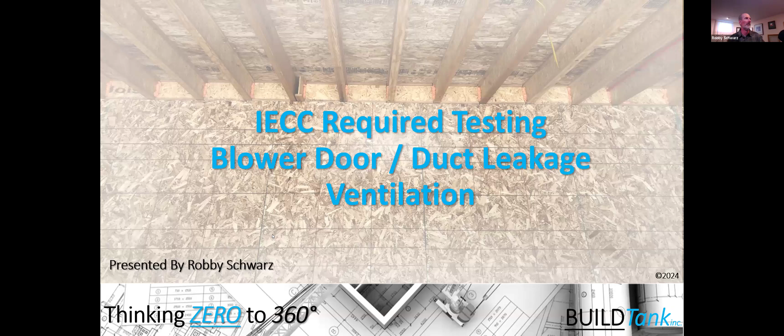You'll see that the title has been broadened slightly to include duct leakage testing and ventilation testing, basically the three main tests required by the IECC. I also wanted to note that next week's presentation on radon testing has been broadened to talk more about the radon issue and mitigation, because testing is a pretty small part of the radon puzzle. So join us next week as well.

Today we're going to talk about these tests. We'll talk about why we care about diagnostics, and we'll cover blower door, duct leakage, and ventilation testing.

The first thing: in the 2024 IECC, the intent statement has been broadened quite significantly to talk about minimum efficiency requirements that result in maximum levels of energy efficiency that are safe, technologically feasible, life cycle cost effective, and economically feasible.

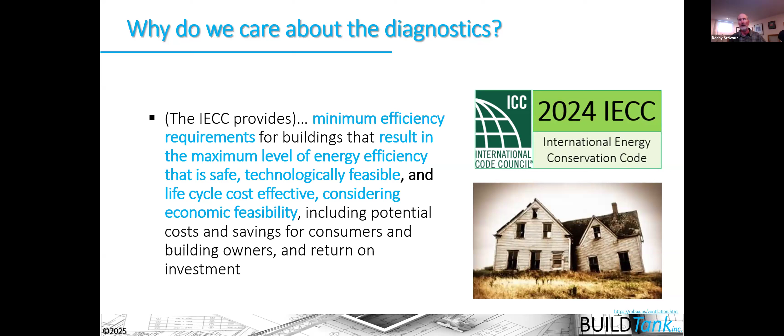Addressing air and air movement in our houses is really the most cost effective way to get an efficient house. We see that come to fruition when you look at the 2012 IECC and the Department of Energy's determination that almost 20% efficiency gains were achieved in that cycle, largely on the back of the requirement for blower door testing in all the houses we build.

When we do blower door testing, we have to go back to the code and understand how it's looking at the building thermal envelope, because we need that clear boundary condition between conditioned space and exempt unconditioned space in order to do a blower door test.

In essence, we need that boundary condition for duct leakage testing and for ventilation testing too. But the boundaries change when we talk about ducts and ventilation - we're talking about the boundary between inside the duct and outside the duct, versus the blower door test, where we're talking about inside the house versus outside the house, conditioned space versus exempt unconditioned space.

We have to be able to clearly define what that conditioned space is, because this is currently primarily a volumetric measurement, and we need to understand what the volume of air is inside that house.

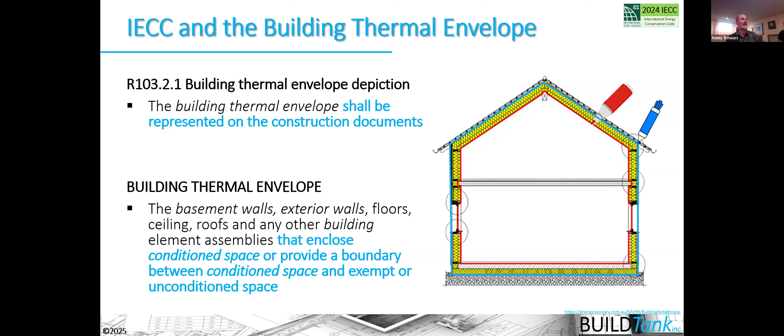So when we get that sound building thermal envelope, ultimately we are able to gain better control and predictability of airflow, thermal flow, and moisture flow inside those houses. This gets us to the question of why we ultimately care about diagnostics: because they help us achieve the requirements.

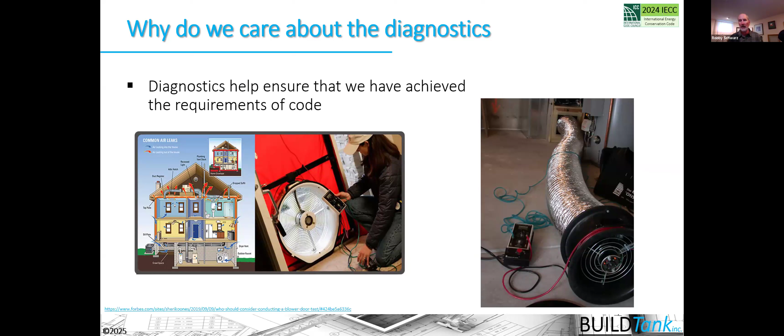One of my mentors used to always say, you get what you inspect, not what you expect. If we're counting on air tightness in our building thermal envelope, duct systems, and ventilation systems to provide the right flow of air, then we have to test to ensure that's happening, because you can't just look at the building thermal envelope and know it's airtight.

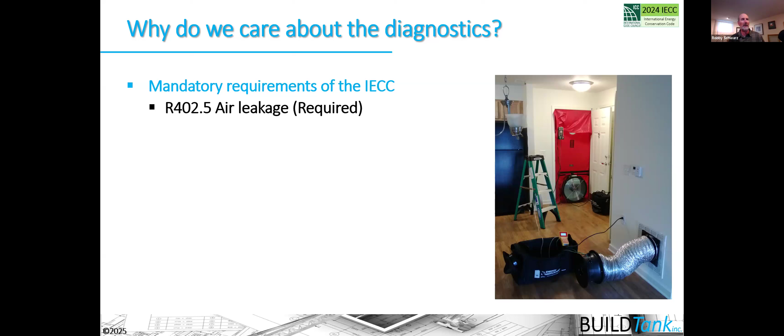There are mandatory requirements in the IECC that help us achieve air tightness, and ultimately we're required to test not only the air leakage of the house but the duct leakage as well. The other thing this does is that in these performance paths through the code, we gain additional trade-off flexibility, so we can potentially trade off house tightness for R-value, or duct leakage and duct location for R-value, giving more flexibility in how we design and construct our building assemblies.

Now, to be clear, what we often call the ResCheck, or the area-weighted U-value compliance approach, uses software in the prescriptive compliance approach for code compliance—that only gives you the ability to trade off U-values and R-values. So you have to go to the simulated building performance approach or the ERI approach, the R405 and R406 pathways, in order to get this additional flexibility. But it is there, and you can take advantage of it.

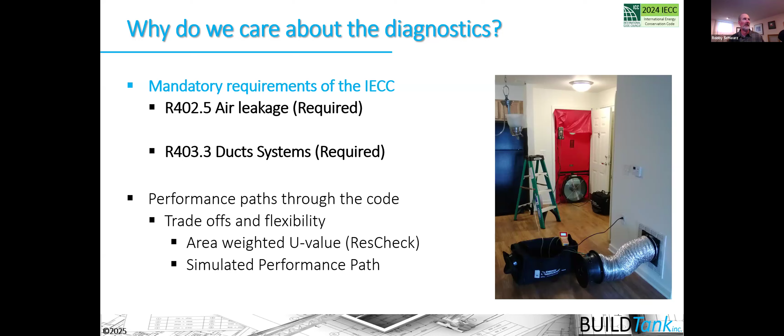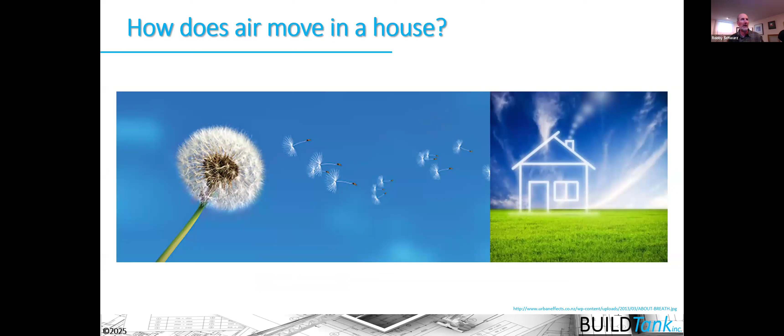So jumping into blower door testing itself, obviously we can test a variety of different building types out there, but we have to have an understanding of how air moves, and air moves in our homes in particular.

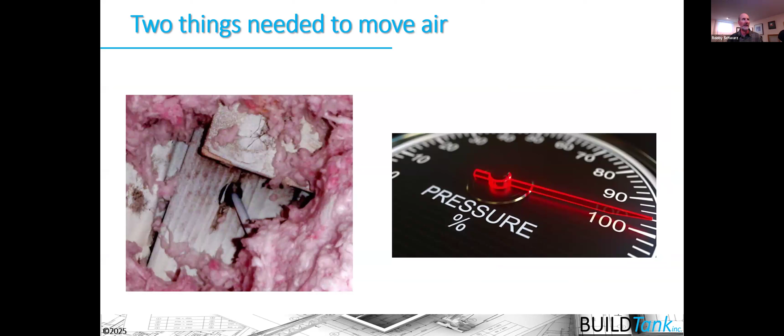So the first thing we need to think about is what has to happen for air to move. We have to have a hole, or this boundary condition that we talked about, in that boundary condition, and you have to have some pressure across the boundary condition in order for air to move across that boundary.

When we talk about pressures across the building thermal envelope, it's always important to know where you're standing and what you're referencing to the outside. In most cases with blower door testing, we're standing inside the house and referencing outside the house. So I have a tube measuring the pressure inside the house with regards to outside the house—I'm always understanding the boundary condition that I'm measuring across.

We have certain ways that pressure is created across that boundary condition of the building thermal envelope, and we call those the stack pressure, the wind pressure, and mechanical pressures that are created there. These are basically forces against the surface of that boundary that either create a positive pressure or a negative pressure in specific zones. So that's what we're trying to determine there.

Ultimately, we're measuring that pressure difference across the boundary. When we do these diagnostic tests, there are a variety of ways you can measure it. HVAC contractors often use inches of water column, but we use a metric unit called pascals, or newtons per square meter, in order to do that.

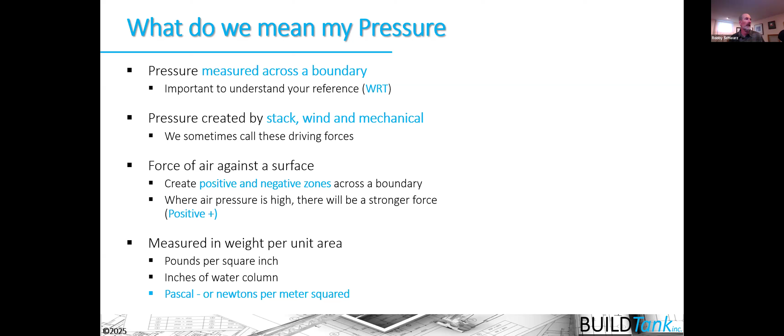So we have this sound building thermal envelope that's defined by the code, and we are determining what the pressure difference is across that hole, or across that boundary.

So you can think of this balloon, for example—the rubber membrane of the balloon—as the boundary, or the building thermal envelope. And if I have equal pressure and no hole across that balloon, then the balloon is going to remain inflated. But as soon as I put a hole in the building thermal envelope, or in the balloon's rubber membrane, the dynamic changes quite a bit.

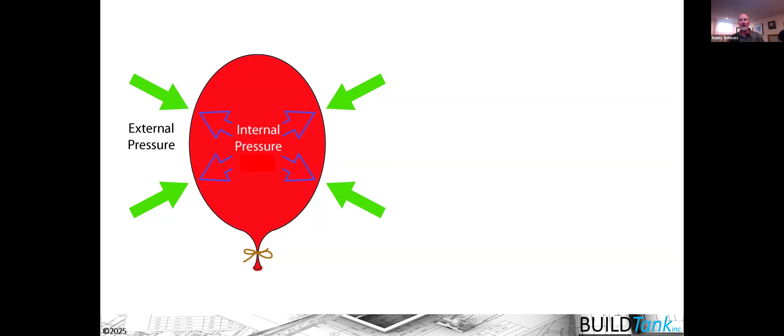So if I untie this balloon, it's going to shoot across the room because I have greater pressure inside than I have outside the balloon. Again, I need the pressure difference across the building envelope, or the rubber membrane in this case, and I need a hole in order for air to move across that hole.

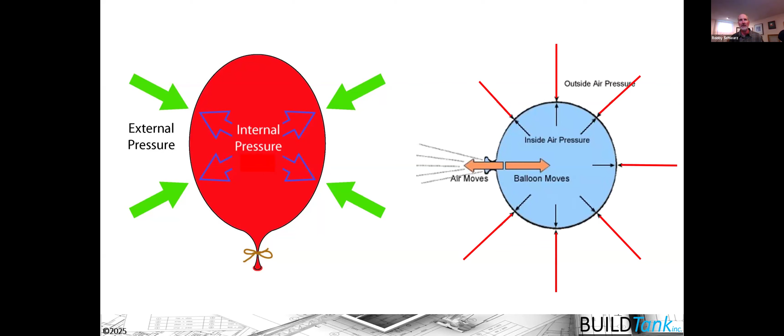And so it's much easier for us to control the holes in the building envelope rather than the pressures there. So the code is all about trying to figure out ways to ensure that we have a tight building envelope.

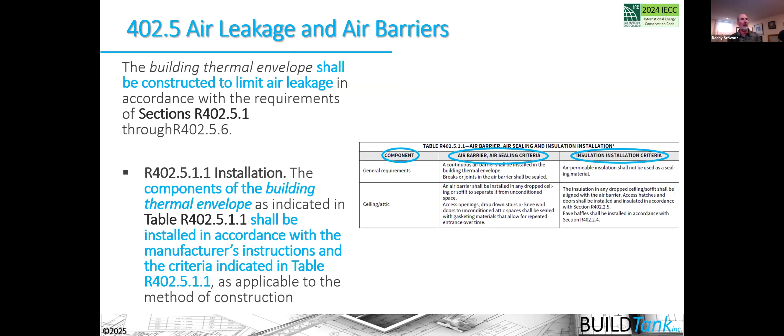That we sealed up all the holes, and therefore we have the air barrier, air sealing, and insulation installation table here, which you could think of as a checklist for how to create an airtight house that's going to meet the requirements of the IECC and seal up all those holes, because I can't really control the air leakage that happens across holes driven by different pressures, the stack pressure, the mechanical pressures, and other pressures we might see in that house. So this table details out these different components, and you can use them as examples of what you're going to see in the house and how to address them from an air barrier and air sealing perspective, and from an insulation perspective. But what that table is ultimately getting at is how air moves through our houses.

So we measure airflow in cubic feet per minute of air moving through the building envelope. So again, we have to have that sound building envelope that we're measuring across. And the notion is that envelope traps a specific volume of air inside of that house. And that volume of air doesn't change once you've been able to clearly define that building thermal envelope air barrier system there. Because remember, the building thermal envelope is the alignment of our thermal layer and our air control layer all the way around the house, including that portion that's going across the dirt at the bottom of the foundation. There's our slab, for example, in a basement, or the dirt floor in a crawl space that we need to contain the air movement through.

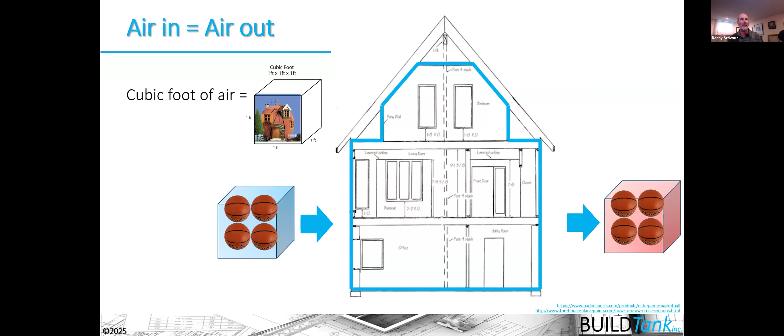So whenever we have a cubic foot of air going through the house, and we can think about a cubic foot of air as a number of basketballs going into the house, then that cubic foot of air has to leave the house. So if a basketball enters the house through wind pressure, then it has to leave the house as well. So air in equals air out, and that's the fundamental building science there. Air is a fluid, just like water's a fluid. We need a hole, and we need some type of driving force or pressure difference across the hole in order to get air to move in and out of our houses. And we measure it in cubic feet per minute, or about the size of a basketball going in and out of our houses.

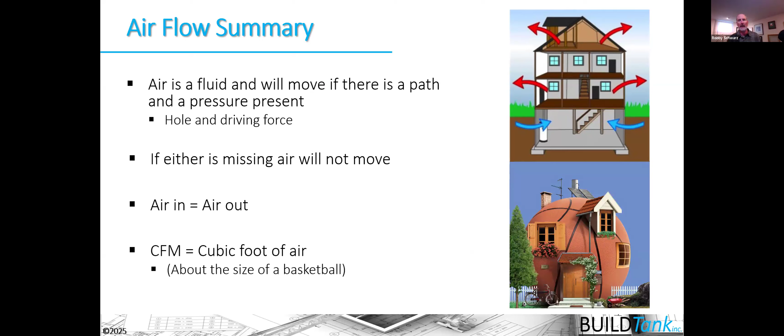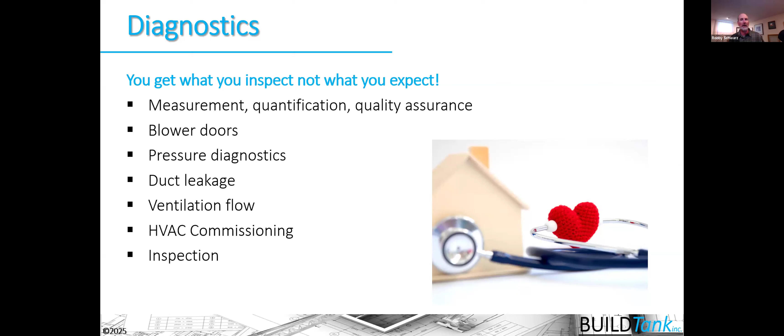So diagnostics, again, you get what you inspect, not what you expect. It gives us a way to measure or quantify and do quality assurance on the building thermal envelope. We use blower doors, and we can do pressure diagnostics with those blower doors. We can measure duct leakage and ventilation flow. We can do levels of HVAC commissioning to understand how much airflow a system is actually achieving. So there are a variety of things we can do with diagnostics, but the code is asking us to build our houses tight and ventilate them right, and we're trying to understand has that actually happened in that particular house in relation to what the code requires.

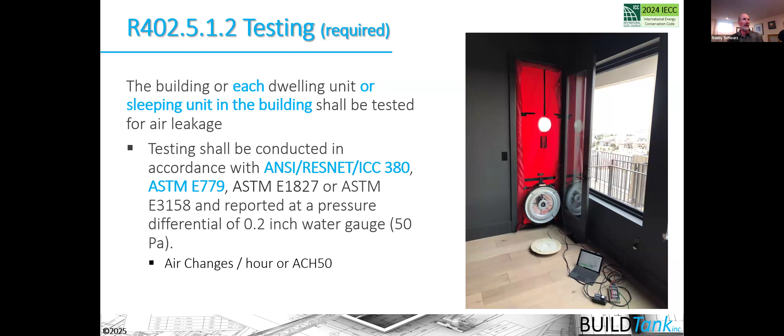So when we do the blower door test, we have to measure the air leakage of that house using a blower door depicted here. And now we have to actually follow a standard for how to do that. Primarily we're using the ANSI/RESNET/ICC 380 standard, which incorporates the ASTM E779 standard and these other standards. So now that the ANSI ICC standard has been created, that's the primary standard we're following, and that makes a lot of sense because the majority of people doing these tests are energy raters, and they're already following these standards. So it makes sense that we've kind of defaulted to the ANSI 380 standard there.

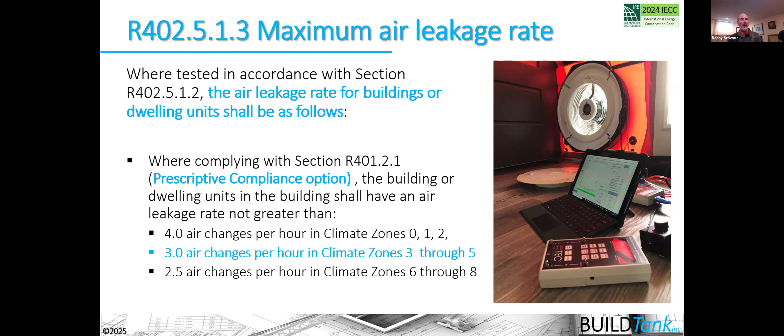Now, where tested, the maximum air leakage rate has changed a little bit in the 2024 IECC when you're using the prescriptive compliance option. They've made different air leakage rates depending on your climate zone. So in our climate zone here, climate zone 5, that hasn't changed. But as you start moving up into the mountains, into climate zone 6 and 7, you're now required to have a slightly more airtight house, 2.5 air changes instead of 3. And you can see that in climate zones 0 through 2, the tightness has gotten a little tighter as well, from 5 air changes to 4 air changes there.

Because air leakage can be used as a method to trade off for less R-value in a building component when you use sections R405 and R406, they had to put in a maximum air leakage rate of 4 air changes. But they've also introduced a secondary method of measuring air leakage, a CFM per square foot of building thermal envelope area, as an alternative means of measuring it, because it turns out that the volumetric measurement in air changes per hour isn't the most effective way to measure air leakage.

We'll talk about that in a little bit, but this section has been made significantly more clear than in the 2021 IECC, where this first came into account, with a different air leakage rate for the performance compliance approaches versus the prescriptive compliance approaches. So when you read it in the 2021 code, you might think they were lessening the air leakage base requirement from 3 air changes to 5 air changes.

But that's only in relationship to the performance compliance approaches, R405 and R406, because you potentially can do this trade-off that doesn't happen very often, where you might put more insulation in the house in order to have a leakier house. In most cases, the trade-off works where you're tightening up the house to reduce the R-value in certain locations, not the other way around, but they wanted to put in a backstop to guard against that. This is how it's expressed in the 2024 IECC, which again is much better than the way it's expressed in the 2021 IECC.

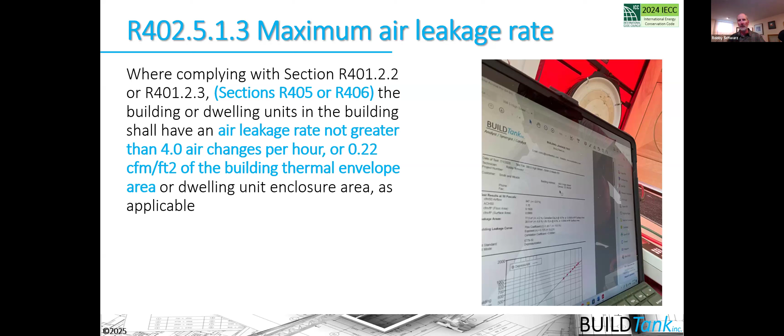The basics of a blower door test: you put a device, a blower door, into the building thermal envelope. It's an airtight assembly with a fan blower inserted into a nylon fabric. Ultimately, we are depressurizing the house, sucking air out of the house and forcing air to come back in. Remember, air in equals air out, the basketball analogy we used before.

This is a scientific, repeatable test because of the standards we're using. So if I do the test in Colorado and somebody else does it in Massachusetts, we're doing the test in the same way, and we're going to get repeatable results.

But it is measuring a moment in time, and we need to understand that, because at different times of the day, the wind might be blowing, or the stack effect might be higher when temperatures are different inside and outside the house. Ultimately, we're getting an understanding of how leaky the house is, but it's not representative of how the house is going to leak every minute of the year, every day of the week.

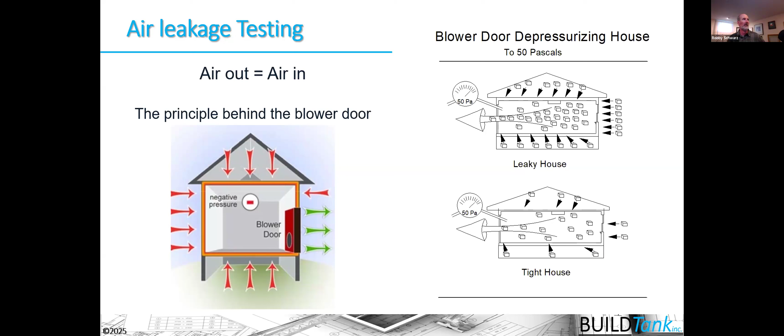Ultimately, how we're measuring that is using the pascals of pressure across the building thermal envelope, and then measuring the cubic feet of air that's moving through the fan. We need to talk a little bit about pascals, because they are a very powerful unit of measurement in the metric system that gives us the ability to measure positive and negative pressures across the building envelope.

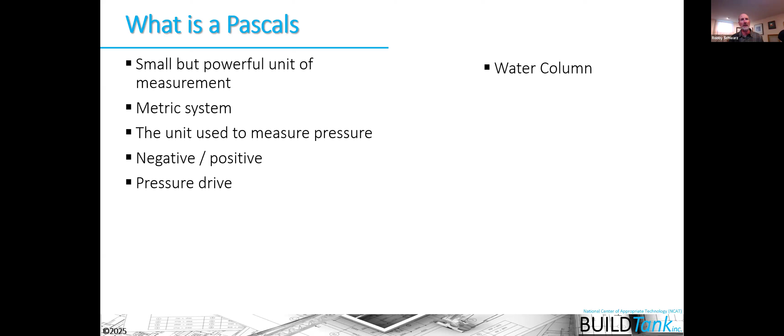It's similar to measuring using water columns, so I'm going to give us an analogy of water columns: 1 inch of water column is equal to 250 pascals of pressure.

One post-it note pushing down on your hand is equivalent to roughly 1 Pascal. Another way of thinking about it is the pressure in your tires is equivalent to about 250,000 Pascals. So it's a small unit of measurement, but a really powerful one, because it only takes a very small negative pressure to backdraft an atmospherically vented water heater and get carbon monoxide flowing inside the house rather than outside.

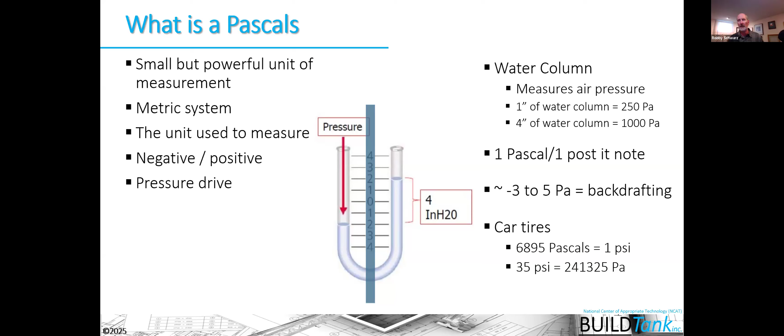We always want to understand the units we're measuring in and why we're using those powerful units of measurement in Pascals, because they get us down to the details we need when doing combustion safety testing with a blower door, or other types of pressure measurements we might do with a blower door beyond just the blower door test itself.

The blower door test helps us understand how airtight the house is, how much leakage is happening under relatively natural conditions, because when I depressurize the house to 50 Pascals, it's roughly equivalent to a 20 mile an hour wind on all surfaces of the house simultaneously under these test conditions.

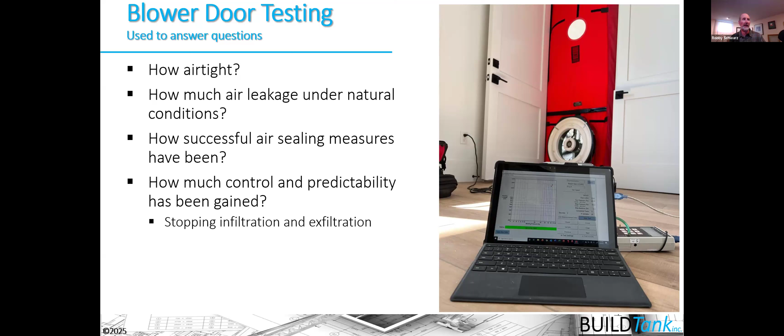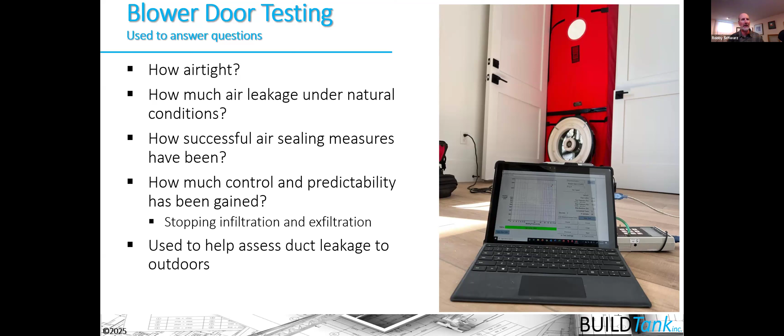We can see how successful we've been at air sealing the house, how much control and predictability we're gaining over the airflow, moisture flow, and thermal flow happening throughout the house. We want to close up those holes and limit the infiltration and exfiltration happening in the house. And we'll see, as we talk about duct leakage, that we need the blower door to measure duct leakage to outdoors, which gives us an additional trade-off credit in our houses.

I wanted to talk about the difference between infiltration, or random air leakage, and ventilation, because that's confusing to some people. We need to understand that infiltration is uncontrolled air movement from outside to inside the house, or inside to outside if we call it exfiltration instead, whereas ventilation is a controlled process where we bring mechanical ventilation systems into the house to bring air in and out in a controlled and predictable fashion.

Now, we might be using holes in the building envelope to ventilate the house as well, if we're using an exhaust ventilation strategy or a supply ventilation strategy, but we're putting that fan in so we know exactly how much air is moving through the holes in the building envelope, and we're putting it on a timed system so we have better control and predictability.

The building science is basically saying that we need that control and predictability of ventilation air, and we need the tightness of the house, in order to gain better control and predictability of airflow, thermal flow, and moisture flow inside those houses.

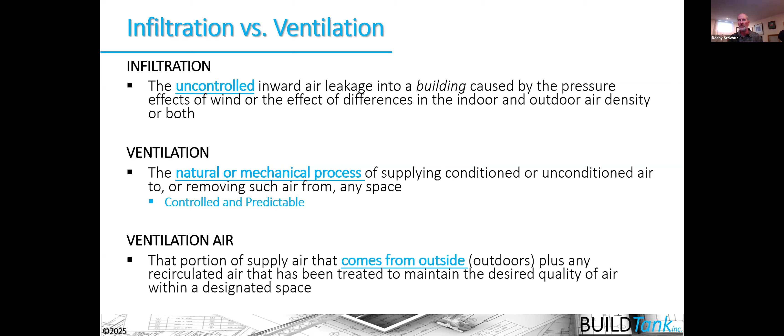One of the last things I wanted to talk about: new to the 2024 IECC is that if you're dealing with attached housing that's 3 stories or less, basically multifamily housing, you are now allowed in the 2024 IECC to do a sampling of testing in those units instead of having to test every single unit in a 3-story multifamily building.

So if you're in charge of a jurisdiction, you want to take that into account because you'll definitely be asked about that. This brings up the notion that there are different types of blower door tests you'll also be asked about. If we have a detached single family home, it's different testing that enclosure versus testing an enclosure inside a multifamily building that's 3 stories or less.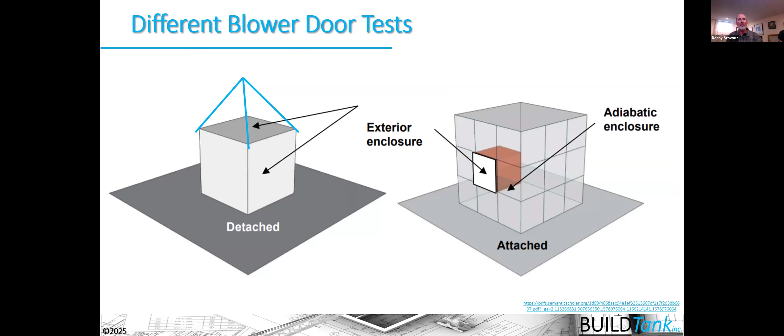When we're talking about attached housing, we're often talking about whether there's leakage happening across the wall system or the floor system that is adjacent to additional attached units in that building.

I can tell you in townhouses and duplexes that there's very little leakage happening from unit to unit. Most of the leakage is associated with shaft liner area separation walls and the 3/4 inch gaps required by the assembly, but attached to the outside or attached to ventilated attic spaces.

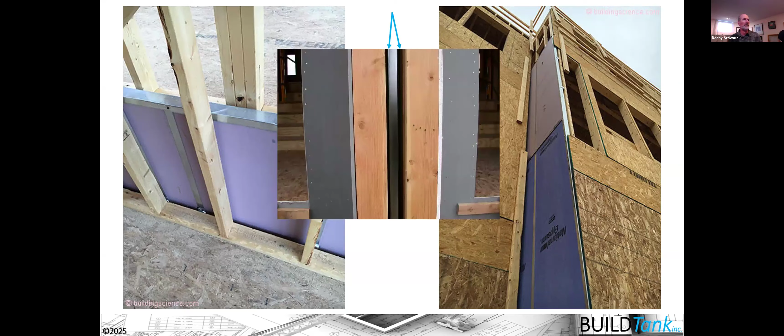But when we get into multifamily buildings, that dynamic might change because we have a bigger thermal envelope that is the boundary there. So you might be asked: can I do compartmentalization testing?

Can I do whole building testing, or can I do guarded testing when we're doing these types of blower door testing on multifamily buildings that are governed by the residential energy code there?

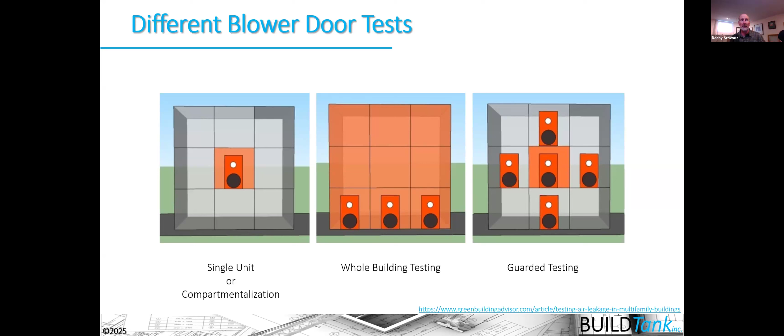My favorite is the single unit compartmentalization test, because it ensures that from an energy perspective we're creating an airtight house to stop leakage from inside the unit to directly outdoors, but I'm also dealing with health and nuisance odors that might be coming from adjacent dwelling units leaking across this assembly. So if this is tight, the unit's front wall adjacent to the outside is going to be tight as well, and we're going to have less energy issues, but I'm also maybe not going to smell the guy next door that's smoking pot or whatever they're doing there. So I like the compartmentalization test.

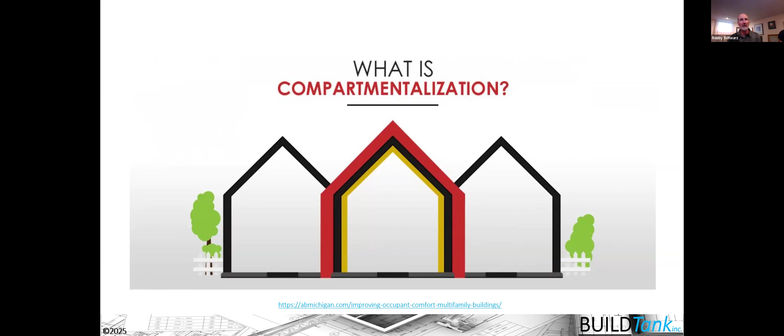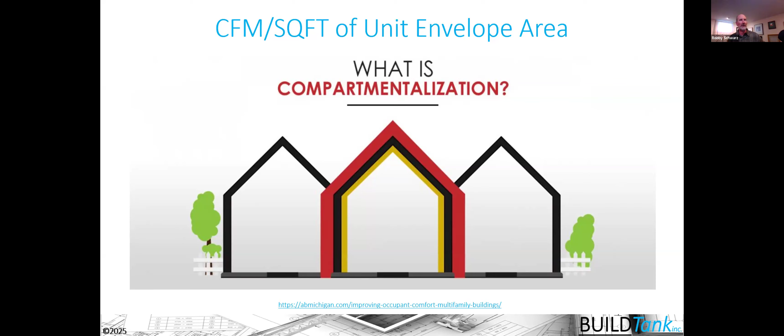It's the most economical testing to do, but you might be asked about the other types of tests. This is the test where that other metric comes in, where we're getting the CFM per square foot of unit enclosure or envelope area. We're trying to figure out how much leakage is happening through the actual building envelope rather than just this volumetric measurement. Now, the other thing this brings up is what we call guarded testing.

So if I only want to know the efficiency determination of this unit, then I only care about the leakage at the front of the building and at the back of the building. So those two walls of this center unit are what I care about from truly the energy perspective.

In order to get just that leakage, I have to put blower doors in the surrounding units to take out the leakage happening across the common wall or common floor between these units. If I depressurize all of these units simultaneously to 50 pascals inside the unit in relationship to outdoors, then I've taken away the leakage happening across the wall, and I can measure just the leakage happening to the outdoor unit. That is definitely possible to do, and you might be asked if I can do that in your specific jurisdiction.

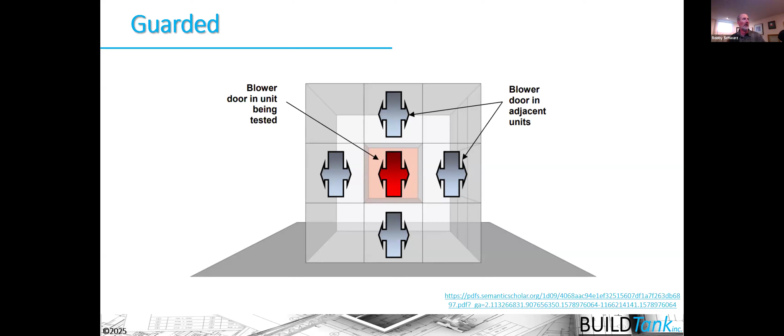But what I would say is that it's costly, because I have to have a number of blower doors set up simultaneously to do that, and a number of technicians out on site. So again, I think the compartmentalization testing is the most cost-effective testing that's out there.

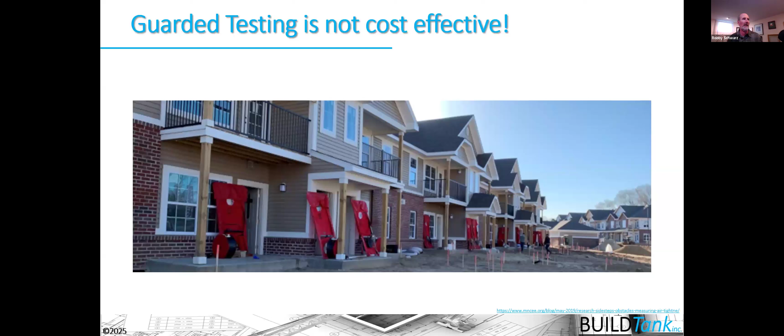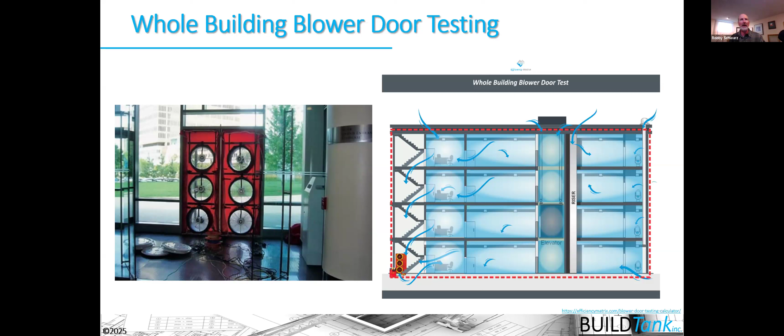I might need 6 blower doors to do that, to depressurize it to 50 pascals, or potentially you might have to change your metric to 75 pascals of pressure inside the building in relationship to outside the building. But you can do that and get the results. So again, there are a variety of different ways to do blower door testing, and you might be asked about that in your particular jurisdiction.

I think the last thing I wanted to talk about with regards to blower doors is that you can utilize the blower door to measure other things, like whether the garage is actually separated from the house as required by code.

Now, only one jurisdiction that I'm aware of in Colorado requires this particular test, and that's the city of Fort Collins, which requires that the garage be measured and proven to be separate from the house because of the health and safety issues associated with that garage connection.

But it's a very simple test to do. If you have a blower door already set up, it takes an additional maybe 5 to 10 minutes to get that number and ensure that the garage is separated. So you can do these, what we call zonal pressure testing, to ensure that a specific zone or building cavity, or in this case garage, is actually separated from the house.

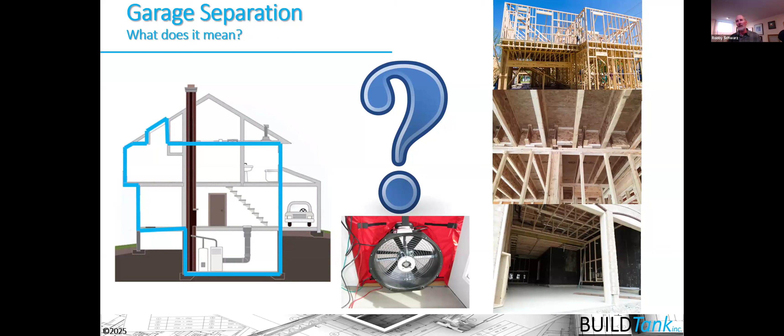While I'm talking about garages, I should make it clear that the garage is always outside the building thermal envelope. Even if that garage is heated, conditioned, and insulated, you never include the garage space in the volume of the space you're testing for air leakage during blower door tests, because of all the incidental stuff we store in garages that are health and safety issues—our car that we start up putting carbon monoxide in there, paints, gas, insecticides, and other stuff. We want to make sure that air is always outside the habitable space of the house.

Let's move on to duct leakage testing. We have to clearly define the duct system, and the 2024 IECC has taken another stab at defining it so we're crystal clear that we're including the entirety of the duct system—things like filter boxes, air handler cabinets, and other transition pieces—all the way out to the duct boot and its surface, not inside the duct boot. We want to tape off these systems appropriately to ensure we're getting the entire duct system incorporated when measuring duct leakage.

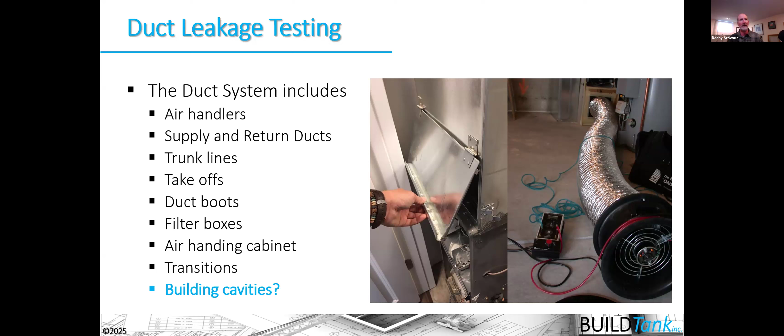We have to take into account that building cavities are excluded. We are not allowed to use building cavities as pressurized duct systems in the International Energy Conservation Code. That happens in R403.3.2, where it specifically says we can't do that.

This is an example of a building cavity being used in a ranch-style house on a summer day. You can see the duct system's return is pulling air back to the furnace cabinet to recool, since it's the cooling season being represented here. You can see how hot air in our ventilated attic is being pulled into the house through this ducted return, which is utilizing this building cavity.

You might be asked about this because there's a bit of discontinuity in the codes. In the IRC mechanical section, it does say you can use plenums and building cavities in certain ways, but you have to remember the idea of applicability. This is a section in every code that basically says the most restrictive requirements shall govern, and it's really important that we don't use building cavities here.

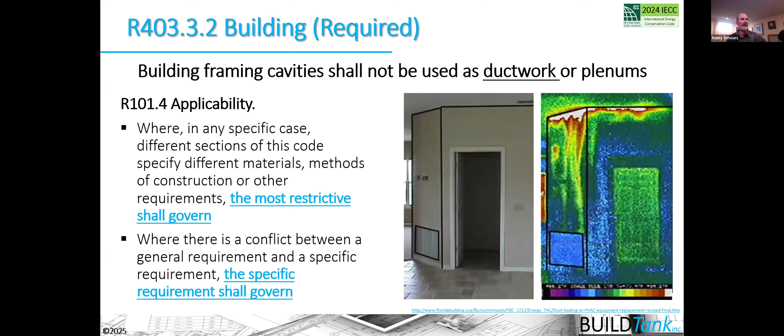It's also important because of how our duct systems are designed. We see more building cavities on the return side than on the supply side. On this return side, the opening defined by this grill is supposed to determine how much air goes back to the furnace cabinet to properly heat and cool the house. But in reality, this hole in the bottom plate actually governs the amount of air that can get back to the furnace cabinet. So notoriously, our houses are under-returned when using building cavities because of this type of scenario.

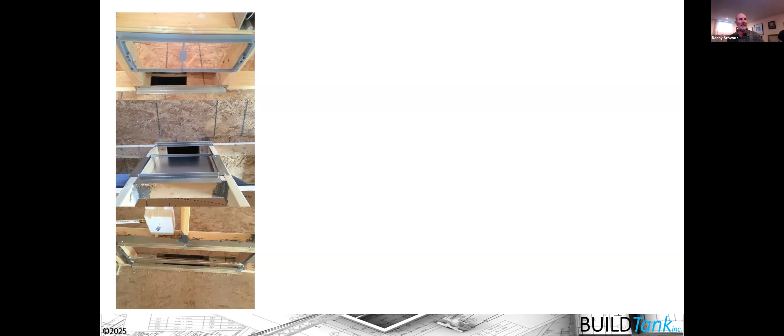It's also very difficult to air seal a building cavity, and sometimes you find things inside building cavities that are prohibited from being inside a ducted cavity that's trying to return or supply air to the house. We want to make sure those things aren't incorporated into those systems when we're measuring them.

So how do we actually measure air leakage through a duct system? This protocol takes us through the steps. We start by blocking off all the known openings—all the supplies and returns in that furnace and HVAC system. Then we install our duct leakage testing device, sometimes called a duct blaster.

We install a pressure probe inside the duct so we can measure the pressure inside the duct in reference to outside the duct, because we're going to use that duct testing fan to introduce a common pressure of 25 pascals inside the duct relative to outside. So I'm pushing that fan pressure in, and it's going to leak out of random holes in the duct system if I've properly blocked off the known supply and return registers in that house.

So I'm pressurizing the ducts, getting 25 pascals inside the ducts relative to outside, basically doing the same thing I did with the blower door test. In order to achieve that 25 pascals, I want to measure how many CFM of air is going through the fan to achieve that pressure. I've got a smart gauge here, a smart manometer, measuring pressure on this channel as if it were at 25 pascals.

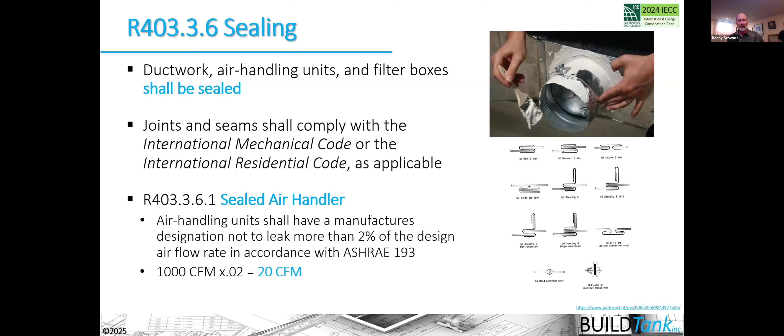The code tells us we have to make these systems airtight, and as we require the system to get tighter and tighter, these manufactured joints start leaking more and more. So these joints need to be air sealed - every seam, every joint, every connection point. We always recommend you do that with a mastic product rather than tape, because mastic will last over time, and our houses we hope will last, be those 100-year-old houses.

In the 2024 IECC, the duct leakage requirement has changed a bit, or at least how it's talked about is now reflected in a table rather than just language in the code. If space conditioning equipment isn't installed, or if all components of the duct system are installed, depending on the number of returns in that house, I can leak either 4 CFM or 6 CFM per 100 square feet of conditioned floor area served. As the square footage gets smaller, this leakage rate gets smaller, so they put in a fixed rate of leakage if you're under 1,000 square feet.

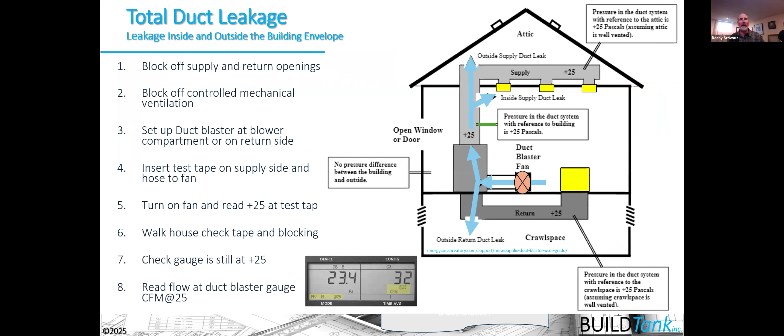For example, if that house we were just looking at was 1,000 square feet, and all components of the system were installed, I couldn't leak more than 40 CFM of air. In that case, I leaked 32 CFM of air, so that house passed its air leakage test for the duct system installed. You can also see that if all components are installed inside the conditioned space of the house, you're given even more leeway in the amount of duct leakage allowed.

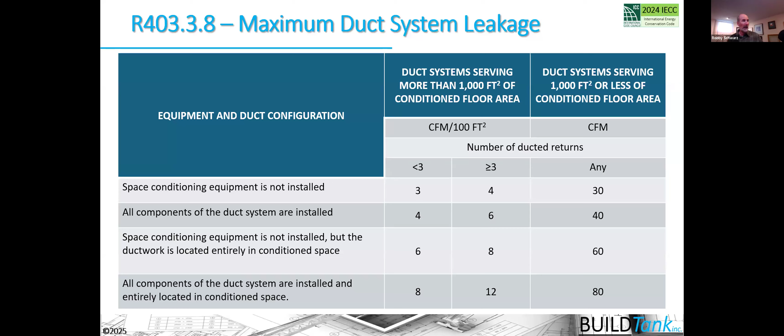But now in the 2021 and 2024 IECC, regardless of where the ducts are located, they have to be tested - that's the big thing. So you want to take a look at this table and understand its requirements. I'd say now in our duct leakage reporting we'll have to include the number of returns in that house so the code official understands where you got your duct leakage target. Just like with blower door testing, you're allowed now to do sampling in multifamily buildings, but those duct systems now have to be tested regardless of whether they're inside or outside the building. Whereas in codes up until the 2021 IECC, if ducts were inside the conditioned space, you didn't have to test the ducts at all.

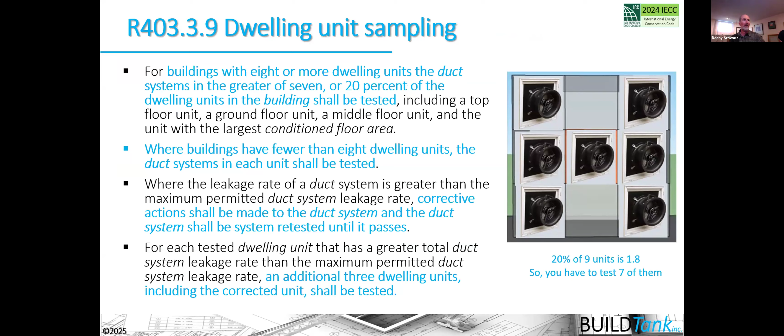Now, what's been made even more clear in the 2024 IECC is that if you're using the R405 or R406 compliance options, you have to do an additional duct leakage test, called duct leakage to outside, so that you can get the benefit of additional trade-offs.

If that duct is leaking nothing to the outside, then you're going to build your trade-off budget so you can trade off that slab edge insulation or that continuous insulation on the outside.

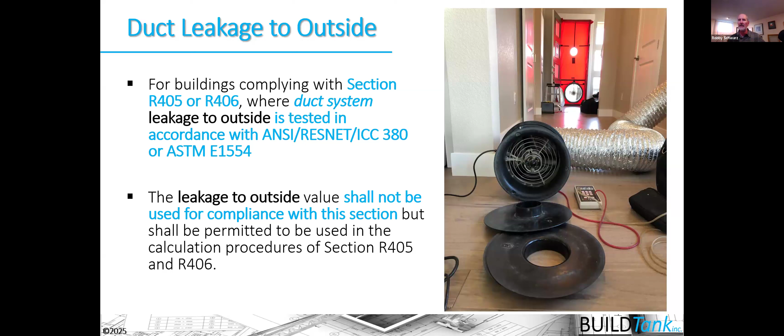So this is a test that needs to be done, and in order to do this test, you need to remember the way that air moves. We need a hole and we need a pressure across that hole. And you also need a blower door and a duct tester running simultaneously during this test.

So we set up the test in the same way that we do for total leakage, where we block off all the supplies and returns in that house. But we also set up a blower door and a duct blasting fan or a duct testing fan. So we use the blower door to pressurize the house and the duct system.

The blower air is going into the house to pressurize to 25 pascals and also going into the opening of our duct testing device and into the duct to get to 25 pascals of pressure inside the duct. So if I have 25 pascals of pressure inside the duct and outside the duct, then this hole, for example, we're not going to have air leaking across that hole.

I need the hole, but I also need the pressure across the hole in order for air to move through the hole. So air isn't going to be leaking out through this hole, but this hole in the attic, air is going to be leaking out because this attic pressure is not at 25 pascals of pressure, while the duct is at 25 pascals. Hopefully that makes sense.

Ultimately, what we're doing is once we have the pressure inside the duct and inside the house both at 25 pascals of pressure, I'm going to measure the pressure inside the duct, and I'm going to use my duct blaster to zero out that pressure and measure how much air it takes to, in essence, close off this hole.

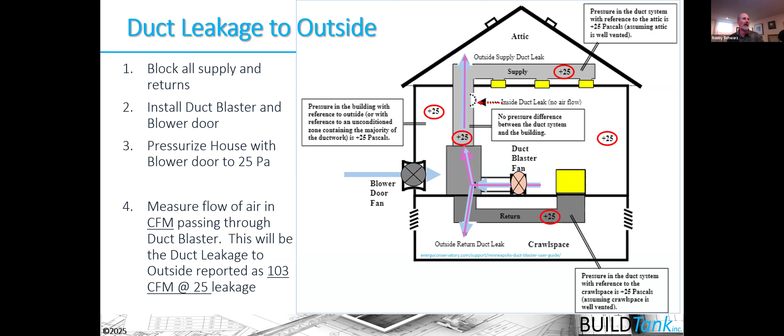So we use these testing devices to tell us about the flow of air through the duct systems, how much is leaking out, but we can also do some additional commissioning diagnostics through pressure diagnostics, through measuring the flow through the duct system with these two methodologies, or a new Standard 310 that's been developed that can potentially give you more HERS points the better your system has been installed and developed.

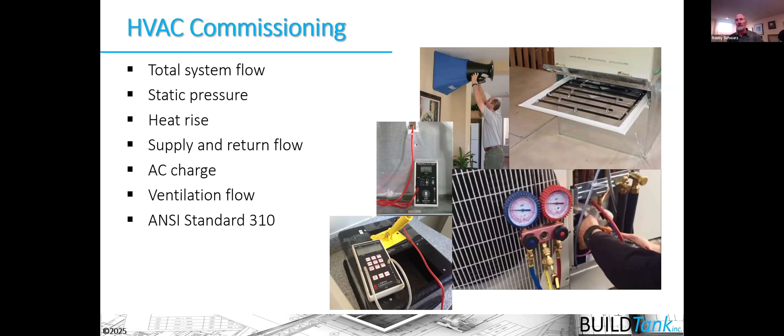The hope is that possibly in the 2027 IECC, Standard 310 will be adopted into the code so that you can get better assurance that the system installed in the house is actually going to perform. That goes beyond just doing duct leakage testing.

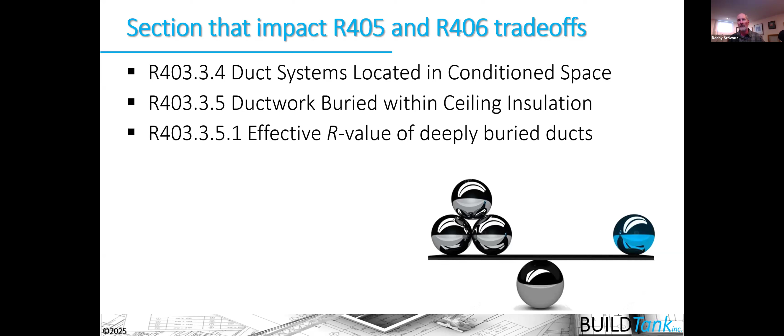Now, there are some other trade-offs given for the R405 and R406 pathways, dependent on where those ducts are located. That goes beyond just duct leakage, so you want to look at those requirements in the code as well if a builder is using the R405 or R406 compliance options.

Okay, so the last 15 minutes we have here, we're going to talk about ventilation, the V in HVAC. So that begins with this kind of question of, can our houses be too tight? Since we don't have time to put out a poll, I'm going to give you the answer: the answer is no.

Houses can't be built too tight. Ultimately, we want to build them as tight as we possibly can because it goes back to that notion of gaining control and predictability of airflow. Air is basically a transport mechanism—it transports heat, pollutants, and moisture in that airstream. So if I can gain control and predictability of the airflow through the house, I gain not only efficiency control, a more efficient house, but I get building durability control and predictability. But as we build our houses tight, we also can never forget that we are asking a different question.

So the question we should be asking is: is our house underventilated? Although this has been a requirement in the code since really the 2009 IECC or possibly even before, we are getting houses that don't have clear ventilation systems installed per the code. Ultimately, why I'm talking about this is because we now have a requirement not only to have the ventilation system, but we also are required to measure the flow of air so that we know it's meeting the requirements of the code.

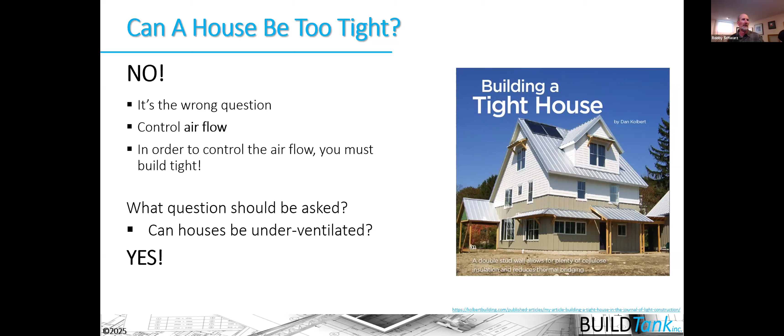So the code has adopted the sound building science that we want to build our houses tight and ventilate them properly. We want to understand the difference between air leakage and mechanical ventilation. Air leakage is that random and uncontrolled movement of air in and out of our houses, while mechanical ventilation has control and predictability. We have a specific rate of air moving through a fan, set on a specific schedule. The schedule might be running 24/7, but we know that, and since we can measure the flow rate, we know how much air is coming in and going out of that house.

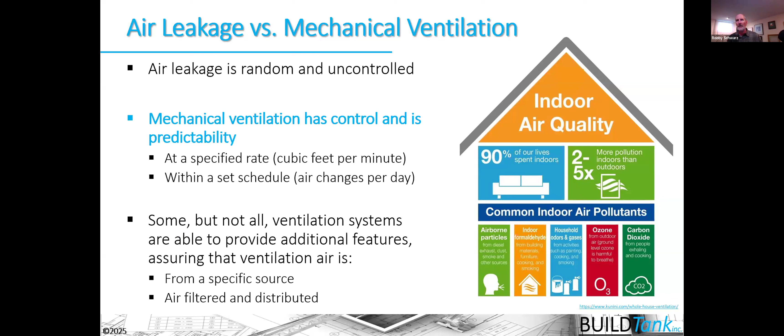Now, some of these ventilation systems can provide additional features like knowing exactly where the air is coming in and going out, or being able to add filtration and distribution to the notion of ventilation. So when we talk about them, we start talking about more balanced ventilation strategies, and these are starting to be required in specific climate zones, and that climate zone is going to ultimately keep moving down in the different code cycles. It won't surprise me at all if in the 2027 IECC, the ventilation requirement moves down to climate zone 5, which I'll show you in just a second.

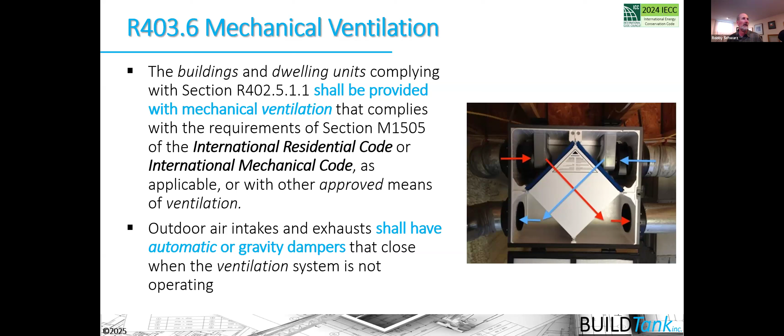But before we get there, I just wanted to show you that ventilation is a mandatory requirement of the code, regardless of how airtight the house is. So we have to understand ventilation and how to measure if it's meeting the requirements of the code. This is where we get the idea that balanced ventilation is now required in climate zone 6, 7, and 8. In the 2027 IECC, it won't surprise me if it moves down to climate zone 5. But I also know there are some requirements to make balanced ventilation required everywhere, regardless of climate zone, because it's simply the best ventilation strategy out there, with the least complications, I guess I should say.

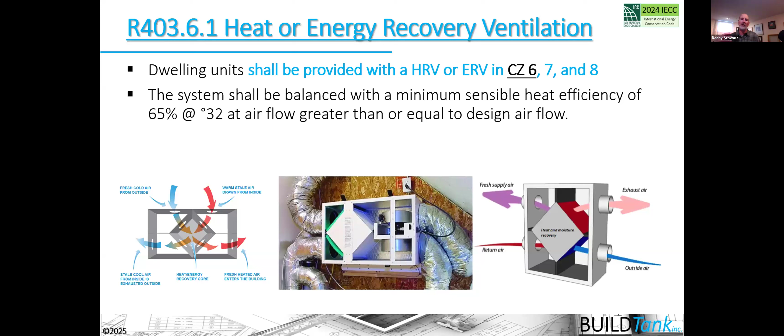Now, these ventilation systems also have to be efficient, because you are using an electric fan to ventilate the house properly. So they have to have at least 65% recovery efficiency at 32 degrees, which means the fan needs to be efficient, but also its ability to recoup heat that might be leaving the house, or moisture entering the house, has to be efficient at doing that as well. So you're really talking about ERVs or HRVs, heat recovery ventilators or energy recovery ventilators, versus random components that you can create balanced ventilation strategies with.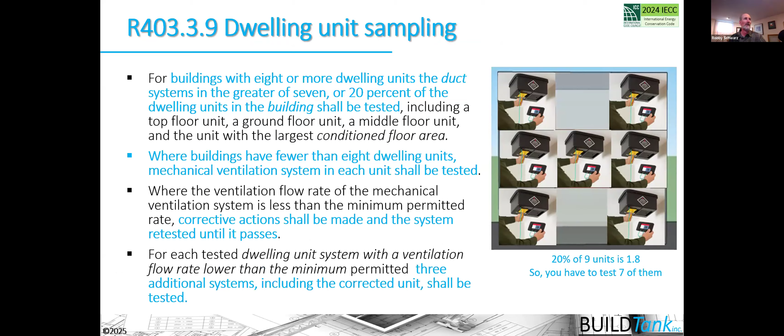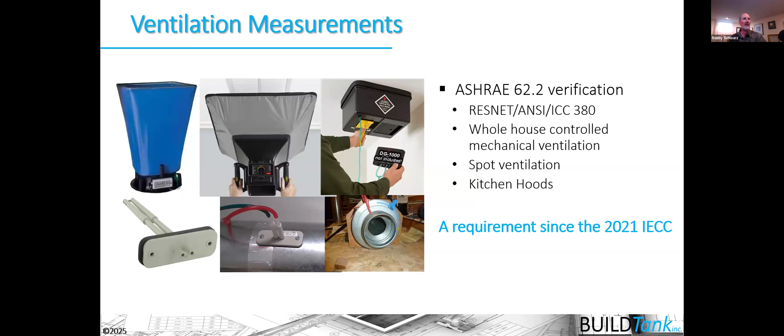Now, in multifamily buildings, just like for blower door testing and duct leakage testing, you can use a sampling protocol if the jurisdiction will allow you to do that. Now, for measuring ventilation, for whole house control mechanical ventilation, we're relying on the ASHRAE 62.2 standard to tell us what the flow rate for that specific house must be, and now we have to actually measure that flow rate. There's a variety of different devices you can use to measure flow rate—we'll talk about some of those here. For exhaust ventilation, some of these fans, you can fix the flow rate, and they use a variable speed fan.

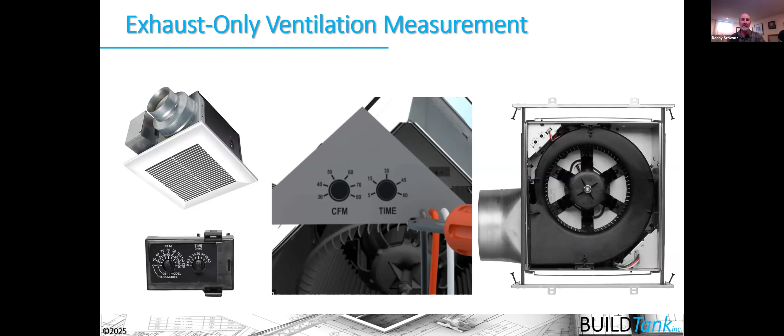So you can set the flow rate here, and this fan will compensate for the static pressure. The static pressure is the measurement of the resistance of flow through the fan, and it will compensate and give you that flow. You still should measure it to ensure that it's getting there, using a flow hood or a flow box to measure the flow of air through a bath fan exhausting air from inside the house. These bath fans are required to push at least 50 CFM of air, because they're only operating intermittently, not continuously.

You can see this particular fan was only measuring 25 CFM of air here. So you should be talking about this with your builders now, because if they aren't consciously thinking about the fan they're installing, and also how they're installing that fan, you're not going to be able to meet these requirements.

The Energy Star program, which has been requiring this flow measurement for years, has definitely shown us that a typical builder grade fan rated to push 50 CFM of air does not push 50 CFM of air once you put ductwork on it.

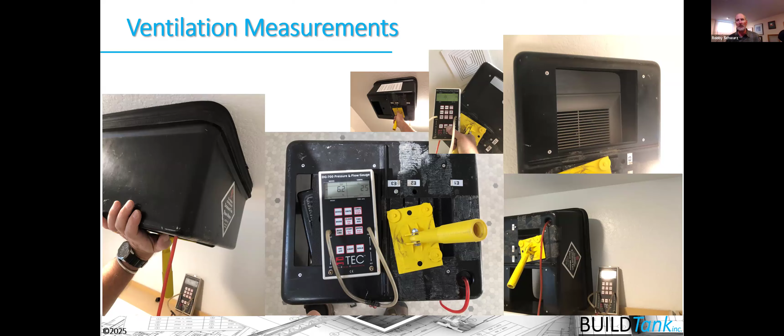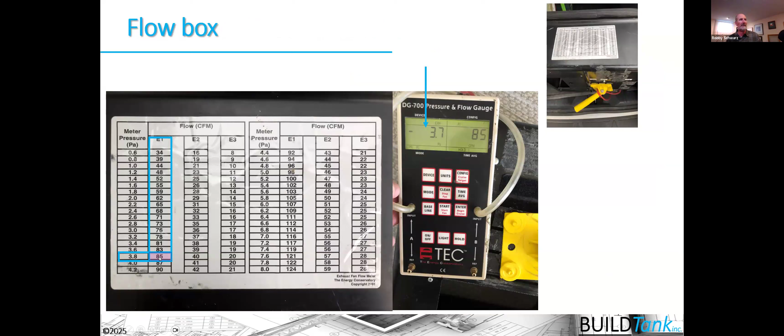This flow box basically gives us the ability to measure the pressure inside the box in relationship to outside the box, and then go to this chart and say, if I'm measuring 3.7 to 3.8 of air and my opening is of this E1 size, that it's pushing 85 CFM of air. And again, it's very precise.

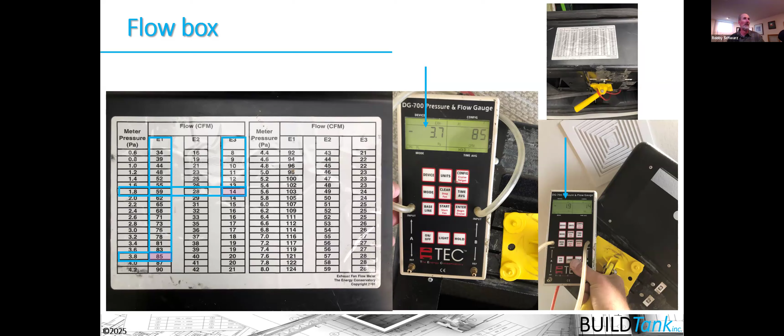It works very well, but we should give some opportunity for the builders and HVAC contractors to know that this test is coming, and that they need to up their game a bit with regards to how they're installing the fans in these systems.

Now, balanced ventilation systems are a little bit more difficult to test if they haven't provided you with these pressure ports. We have to measure the pressure on the incoming air, the outgoing air, and the air coming from the house and going to the outside, if it's 4 sides. And it has to be balanced in order to do that. So these pressure ports make it easy to test.

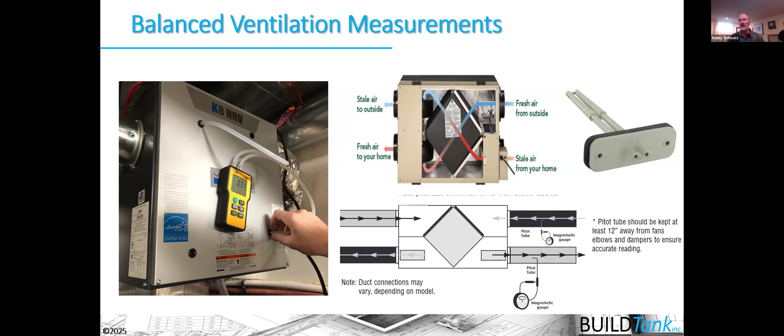If these pressure ports aren't available, then you're using a device like this to get up into the duct to measure the pressure inside the duct and equate that pressure into a flow number. So it's a little bit more difficult, and we need to help the HVAC community understand that we are now required to test these systems, so they need to provide means for us to test it without damaging their systems.

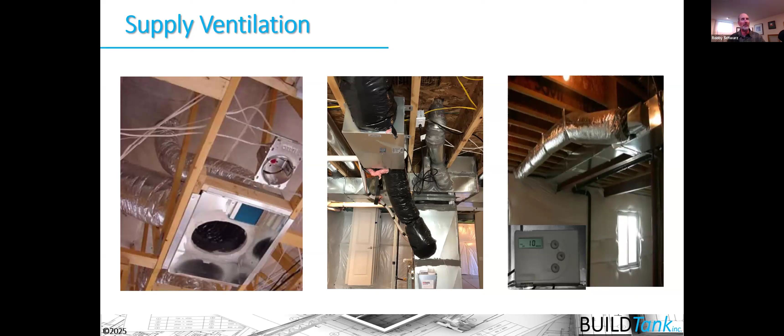Supply ventilation systems are notoriously difficult to measure. If you're going to use a supply ventilation system, I always recommend that you put an iris damper in it, because I can not only measure the flow and the CFM through this iris damper, but I can also control the opening and set it so that it's pushing the correct volume of air required by the IECC.

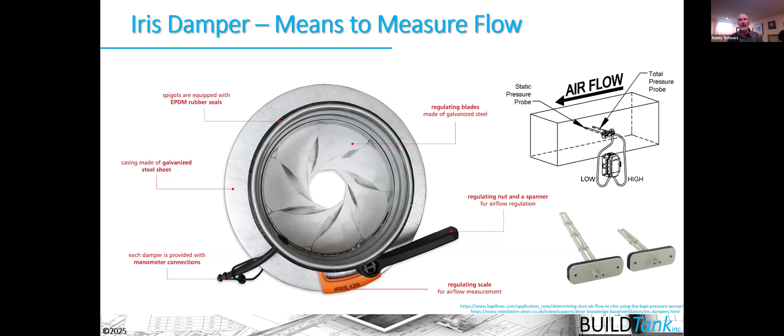Otherwise, you're going to be poking holes in the duct and putting these types of devices in to try to understand how much air is flowing through that ventilation system.

The last one we are going to be measuring is kitchen hood measurements. Kitchen hoods have some exceptions. If you have less than 2 bends and a 6-inch duct attached to that fan, there is an assumption that the system is able to push the minimum 100 CFM of air required to flow through that kitchen hood. Otherwise, you're going to be using flow boxes or flow hoods to try to measure the flow of air moving through that kitchen hood.

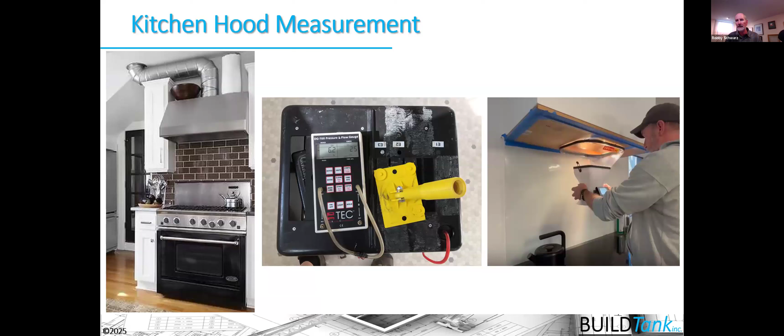This is just an example of why, once you put duct onto a fan housing, you might not be getting the flow that you're required to have, because any elbow in the duct right out of the fan housing is going to create additional fan static pressure that the fan is not going to be able to overcome. So we don't want to tie our ducts in a knot - we want that smooth duct.

So ultimately, you get what you inspect, and that's why these requirements are in the code. The code gives us specific flow rates that we need to meet, and we don't know if we've met them unless we test it. Testing isn't difficult to do.

It's just making sure you have that time and that you're seeing the house at the right time frame in order to make a difference. And that's particularly important with regards to ducts. It's much more beneficial to test that duct at a rough stage of construction so that you could fix the duct leakage if there is an issue there.

You want to look for certified technicians that are doing this duct testing. We are doing some training in rural parts of the state to try to build the infrastructure of technicians that can do these tests, so that the state code that's coming out can actually be enforced and utilized out there. And you also want to use the new standards that are out there for duct testing, for ventilation, and whole building blower door testing as well.